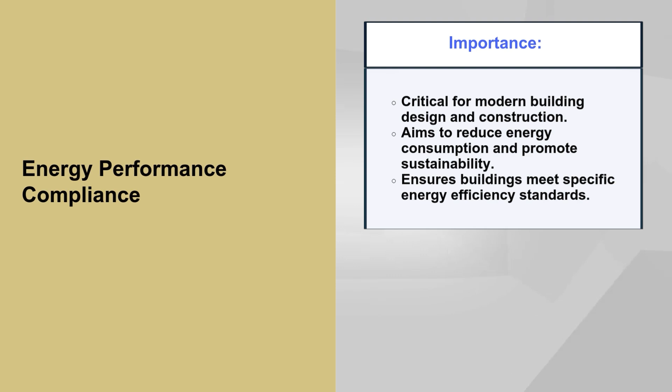Energy performance compliance is a critical aspect of modern building design and construction aimed at reducing energy consumption and promoting sustainability. It ensures that buildings are designed and constructed to meet specific energy efficiency standards, minimizing their environmental impact and reducing operational cost. This presentation delves into the intricacies of the ECBC code compliance framework, focusing on key concepts such as the Energy Performance Index or EPI and EPI ratio.

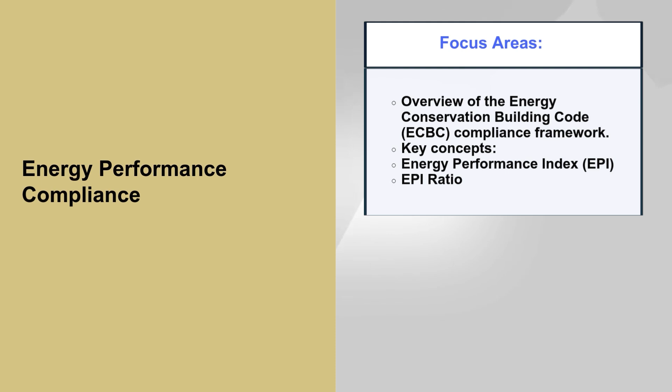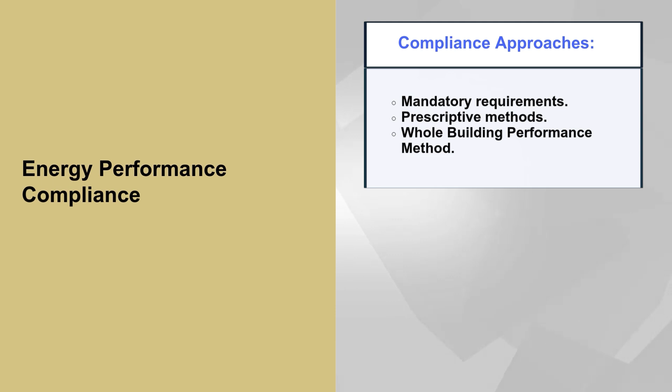We will explore various compliance approaches including mandatory requirements, prescriptive methods and the whole building performance method. Additionally, we'll discuss essential documentation and tools used to demonstrate compliance, providing a comprehensive understanding of energy performance standards in building design. Energy performance compliance is a multifaceted process that involves a collaborative effort between architects, engineers, contractors and building owners. It requires careful planning, design consideration and implementation of sustainable strategies to achieve optimal energy efficiency.

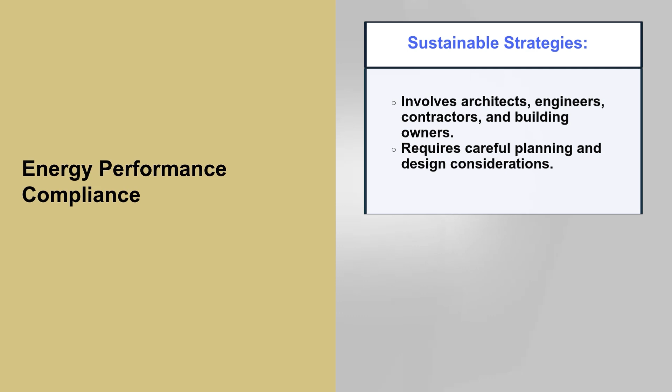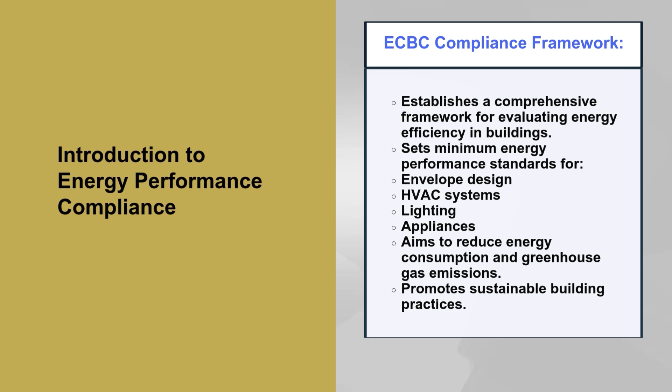This presentation will provide a comprehensive overview of the ECBC compliance framework, guiding you through the key aspects of ensuring energy efficient and sustainable building. Energy performance compliance, ECBC compliance framework. The ECBC code establishes a comprehensive framework for evaluating and ensuring energy efficiency in buildings. It sets minimum energy performance standards for various building components and systems, including envelope design, HVAC systems, lighting and appliances. The ECBC aims to reduce energy consumption, minimize greenhouse gas emissions and promote sustainable building practices.

Energy Performance Index or EPI. The EPI is a crucial metric that quantifies a building's energy efficiency. It is calculated as the annual energy consumption per square meter of the building's total built-up area, excluding unconditioned basements. This metric helps assess a building's energy performance relative to a standard baseline and provides a valuable tool for comparing different designs and technologies. EPI ratio. The EPI ratio compares the proposed building's EPI to that of a standard building. A ratio of less than or equal to 1 indicates compliance with energy performance standards, demonstrating that the proposed building is at least as efficient as the standard. This ratio is essential for demonstrating compliance with the ECBC and ensuring that buildings meet the specified energy efficiency goal.

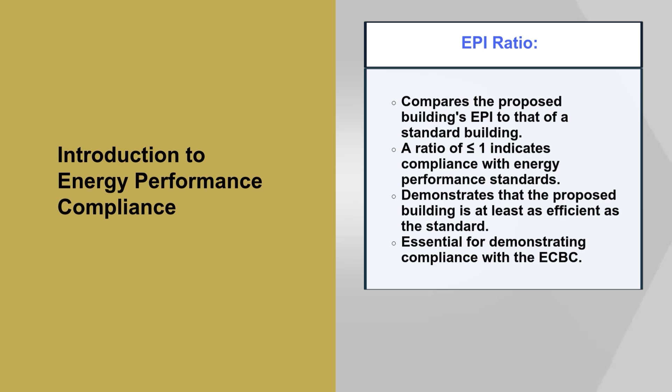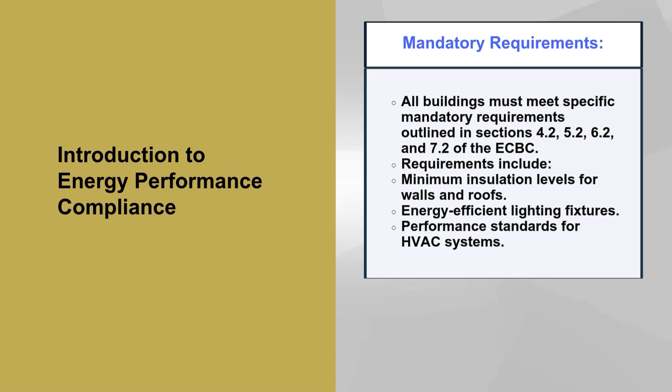Mandatory requirements. All buildings must meet specific mandatory requirements outlined in sections 4.2, 5.2, 6.2 and 7.2 of the ECBC code. These encompass various aspects of building systems and building design, including minimum insulation levels for walls and roofs, energy efficient lighting fixtures, and performance standards for the HVAC systems. These requirements establish a baseline level of energy efficiency that must be achieved by all the buildings to comply with the code.

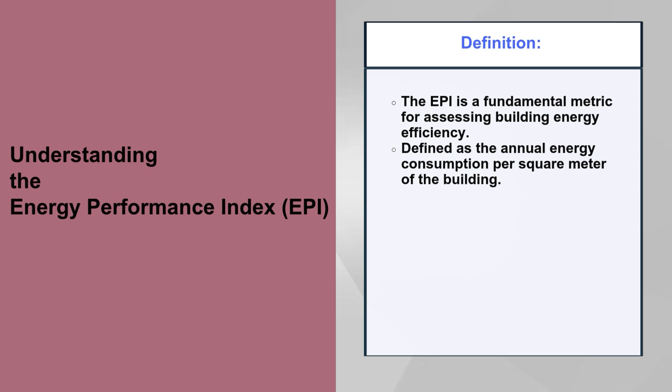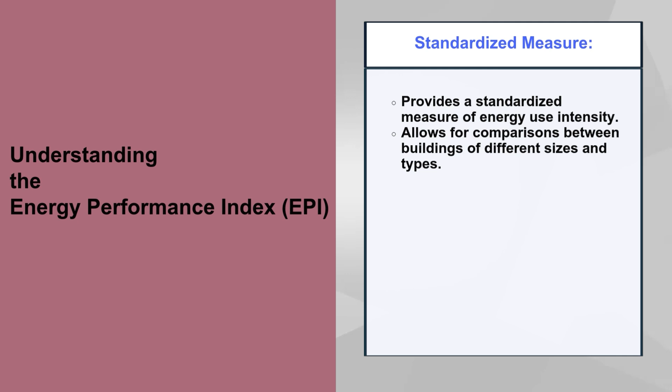Understanding the Energy Performance Index or EPI. The Energy Performance Index EPI is the fundamental metric in assessing building energy efficiency. It is defined as the annual energy consumption per square meter of the building. The EPI provides a standardized measure of energy use intensity, allowing for comparisons between buildings of different sizes and types. The EPI helps assess a building's energy performance relative to a standard baseline and provides a valuable tool for comparing different designs and technologies. The EPI ratio is a critical component in determining compliance with the energy performance standard.

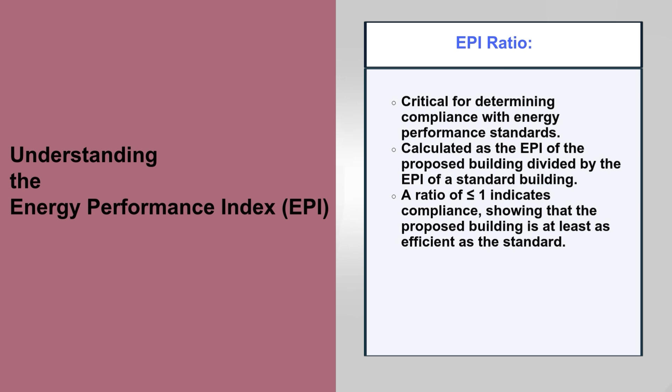It is calculated as the EPI of the proposed building divided by the EPI of a standard building. A ratio of less than or equal to 1 indicates compliance with energy performance standards, demonstrating that the proposed building is at least as efficient as the standard. This ratio is essential for demonstrating compliance with the ECBC and ensuring that buildings meet the specified energy efficiency goal. To achieve compliance, the EPI ratio must be less than or equal to 1, indicating the proposed building is at least as energy efficient as the standard building.

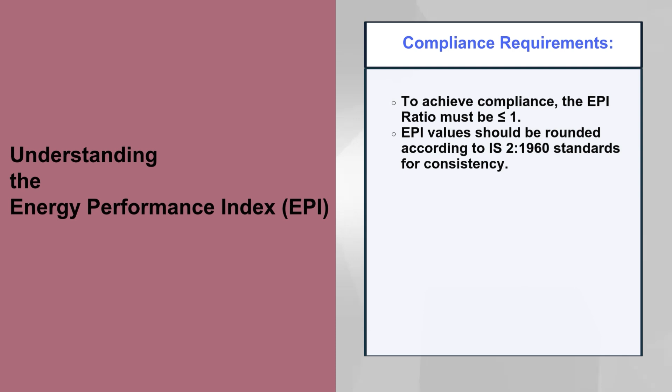It's important to note that EPI values should be rounded off according to IS 2:1960 standards to ensure consistency in calculations and comparison. The EPI and EPI ratio serve as key indicators for a building's energy performance. They provide a quantitative basis for evaluating compliance with energy codes and standards. By comparing the proposed building's energy consumption to that of a standard reference building, these metrics offer a clear and objective measure of energy efficiency, guiding designers and engineers in creating more sustainable structures.

The EPI is a crucial tool for measuring and tracking the energy performance of buildings over time. By monitoring EPI values, building owners and operators can identify areas for improvement and implement strategies to enhance energy efficiency. This data can also be used to benchmark performance against industry standards and demonstrate commitment to sustainability goals.

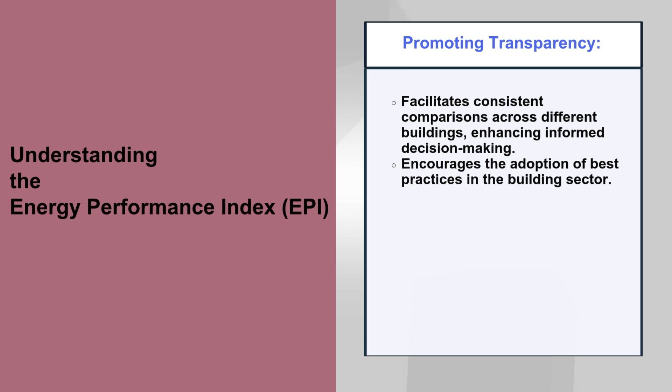Furthermore, the EPI plays a crucial role in promoting transparency and accountability in the building sector. It allows for consistent comparison across different buildings, facilitating informed decision making and encouraging the adoption of best practices. By fostering a culture of transparency, the EPI helps drive innovation and advancement in building energy efficiency.

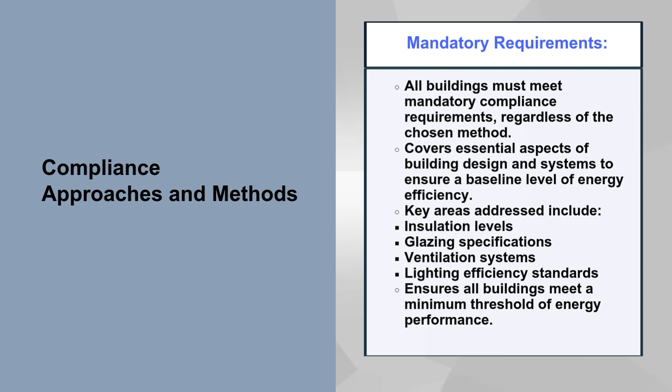Compliance approaches and methods. Mandatory requirements. All buildings must meet mandatory compliance requirements regardless of the chosen compliance method. This requirement covers essential aspects of building design and systems to ensure a baseline level of energy efficiency. These mandatory requirements typically address key areas like insulation levels, glazing specification, ventilation systems, and lighting efficiency standards. This ensures that all buildings, regardless of their specific design approach, meet a minimum threshold of energy performance.

Prescriptive method. The prescriptive method involves meeting prescribed values for envelope components, comfort systems, and lighting. It includes sub-methods like the building envelope trade-off method and total system efficiency method, offering flexibility in achieving compliance while adhering to specific prescriptive requirements. The prescriptive method provides clear guidelines and specific requirements for each building element, making it relatively straightforward to understand and implement. It's particularly beneficial for simpler projects where the design and construction process can be readily adapted to meet the predefined standards. Next is whole building performance method.

The whole building performance method or WBP method allows for a more holistic approach to compliance. Under this method, a building can achieve compliance if its proposed design energy use is less than that of the standard design, even without meeting specific prescriptive requirements. This approach offers greater design flexibility while still ensuring overall energy efficiency. The WBP method provides a more dynamic and adaptable approach to energy performance compliance. It encourages innovative design solutions that may not adhere to traditional prescriptive standards but still demonstrate effective energy performance.

The EPI ratio and WBP method. When using the WBP method, the EPI ratio is calculated by comparing the proposed building energy performance to that of a standard building. Compliance is achieved if the resulting EPI ratio is less than or equal to 1, demonstrating that the proposed design is at least as energy efficient as the standard. This approach allows for a more comprehensive evaluation of the building energy performance, considering its overall energy use and efficiency, rather than relying solely on individual component specification.

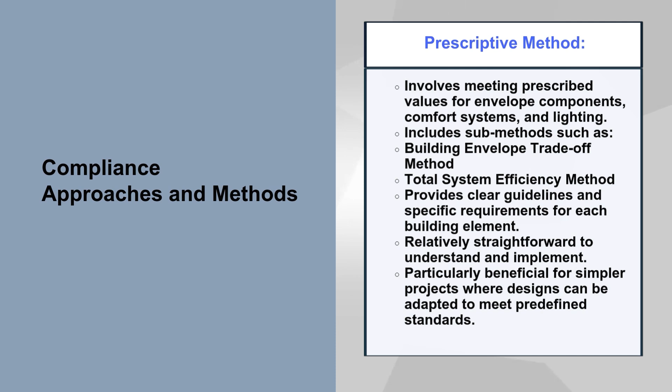Introduction to the whole building performance method. The whole building performance method or WBP method offers an alternative approach to energy conservation in building design as outlined in the Energy Conservation Building Code. This method provides flexibility for architects and engineers to optimize energy efficiency across various building systems while meeting the mandatory requirements. Unlike the prescriptive method, the WBP method allows for innovative solutions and trade-offs between different building components, making it applicable to all building types covered by the ECBC.

The WBP method encourages a holistic approach to building design, considering the interaction of various building systems and their impact on energy performance. This method allows for a more customized approach, tailoring solutions to specific building needs and local climatic conditions. By evaluating the energy performance of the entire building, the WBP method promotes a comprehensive understanding of energy consumption patterns and potential areas for optimization.

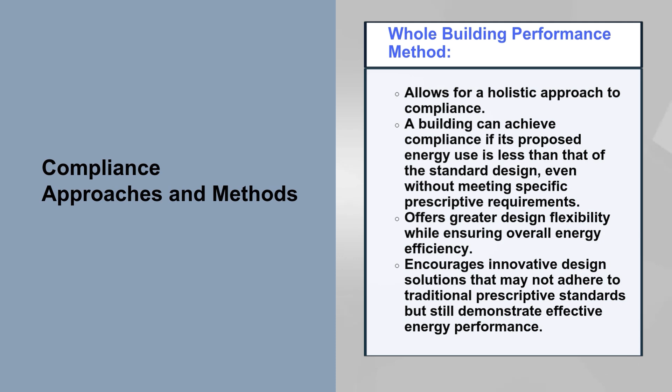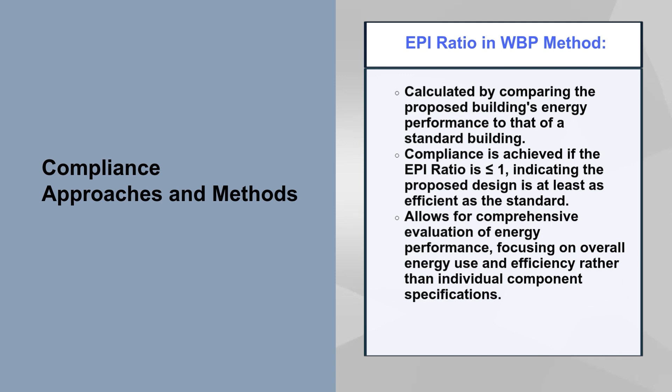To achieve compliance using the WBP method, a building must demonstrate an energy performance index (EPI) ratio of 1 or less, indicating that the proposed building design performs at least as well as a standard reference building. The EPI ratio is calculated by comparing the building's estimated energy use to that of the reference building, considering factors such as building size, climatic conditions, and occupancy. A lower EPI ratio indicates better energy efficiency.

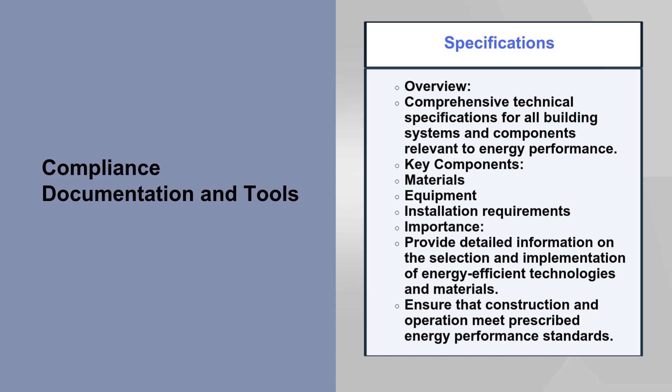This approach encourages holistic thinking in building design and promotes the integration of energy efficient technologies and strategies. By focusing on overall energy performance rather than prescriptive requirements, the WBP method facilitates the implementation of innovative solutions such as renewable energy systems, advanced building materials, and smart building technologies.

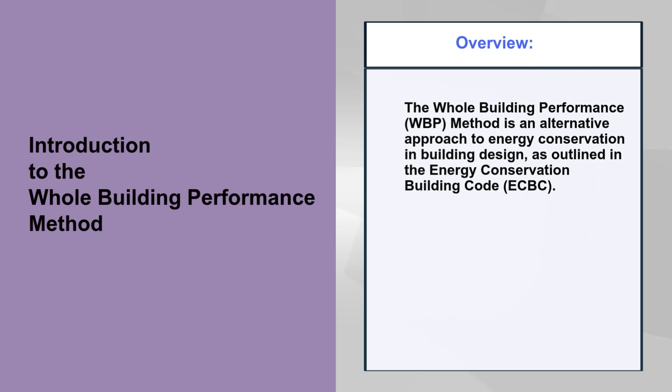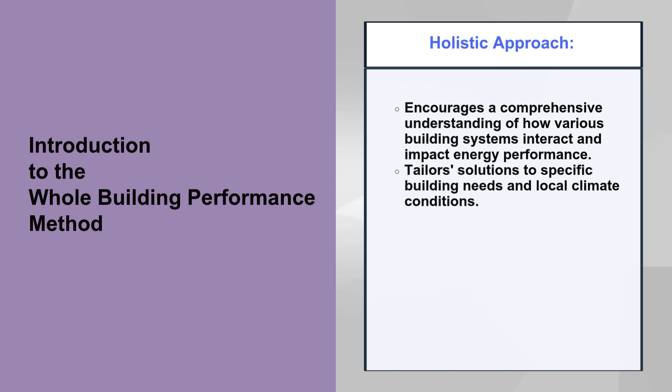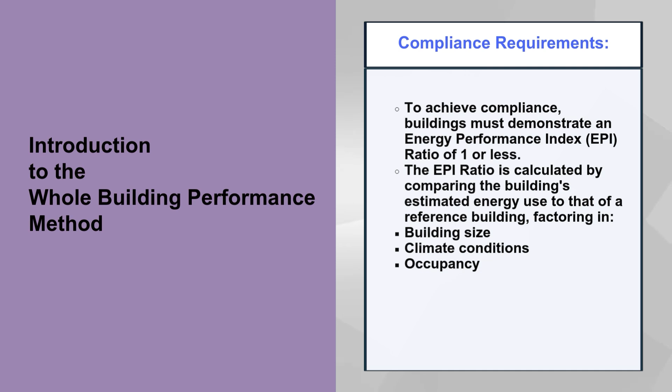Calculating annual energy use and trade-off. The whole building performance method offers flexibility in building design by allowing some trade-off between different building systems, while still ensuring the overall energy performance of the building meets or exceeds the standard. To use the WBP method, you need to calculate the building's annual energy use and compare it to the standard reference building. The following steps outline the process for calculating the building energy use and conducting a trade-off analysis.

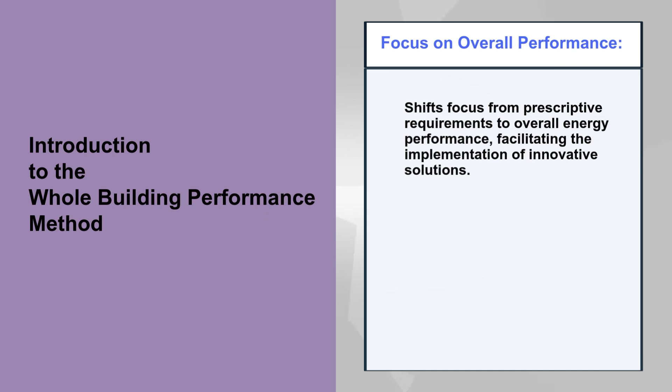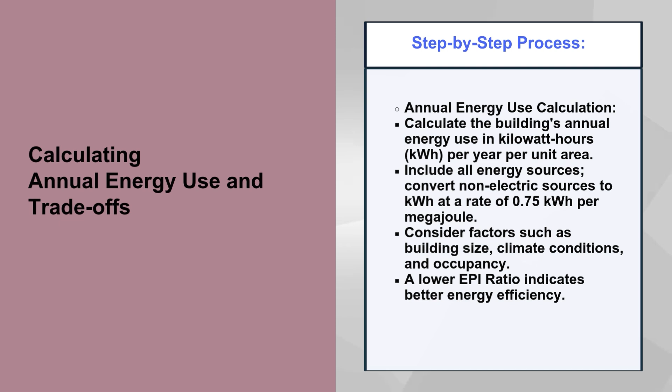Step number 1: annual energy use calculation. Calculate the building's annual energy use in kilowatt hours per year per unit area. This includes all energy sources, with non-electric sources converted to kWh at a rate of 0.75 kWh per megajoule. This calculation considers factors such as building size, climatic condition, and occupancy. A lower EPI ratio indicates better energy efficiency.

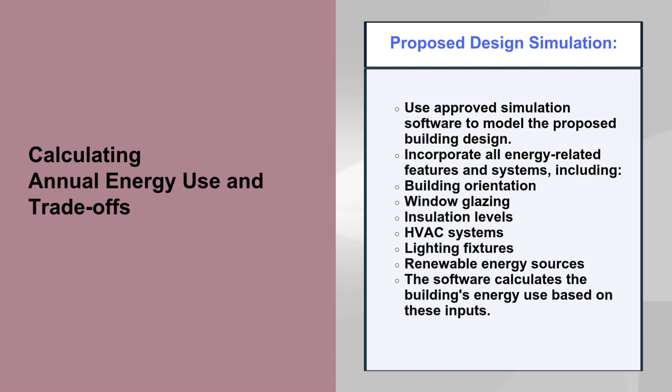Step 2: proposed design simulation. Use approved simulation software to model the proposed building design incorporating all the energy related features and systems. This includes factors such as building orientation, window glazing, insulation levels, HVAC systems, lighting fixtures and renewable energy sources. The simulation software will then calculate the building energy use based on these inputs.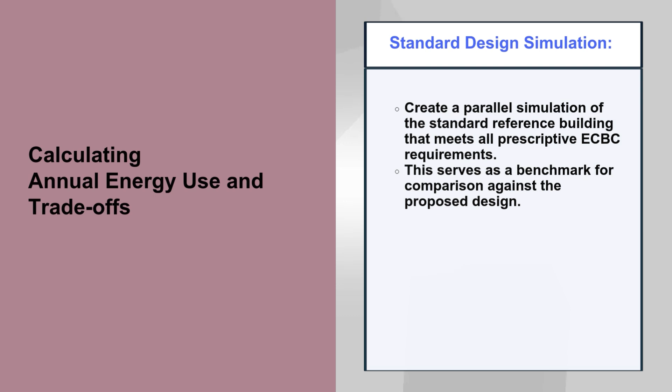Step number 3, standard design simulation. Create a parallel simulation of the standard reference building which meets all the prescriptive ECBC requirements. This simulation will serve as a benchmark for comparison against the proposed design.

Step number 4, trade-off analysis. Compare the annual energy use of the proposed and the standard design. This analysis allows for trade-off between different building systems while ensuring that the overall energy performance of the building meets or exceeds the standards. This means that you can make changes to the building design, such as adding more insulation or using a more effective HVAC system, and then compare the energy use of the revised design to the standard design. This allows you to optimize the building energy performance while still meeting the requirements of the ECBC.

The WBP method allows for significant flexibility in design, permitting trade-off between different building systems. However, it's important to note that this method can be applied to building permits covering less than the whole building, provided that the design parameters not covered by the permit remain identical for both the proposed and standard design. This approach ensures a fair comparison while allowing for partial renovation or additions to existing structures.

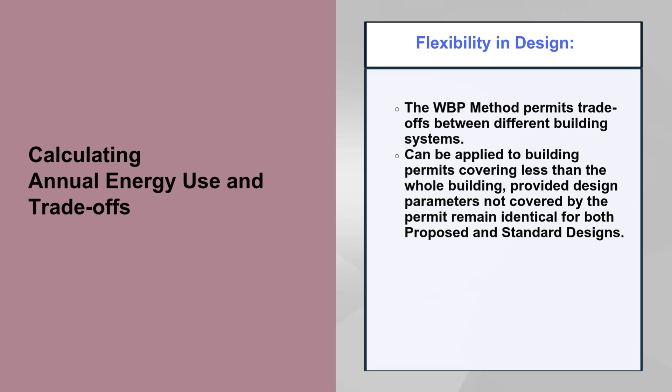Documentation and compliance tool. Documentation requirements. To demonstrate compliance with the WBP method, project teams must provide comprehensive documentation. This includes a detailed summary of analysis results showcasing the energy used for both the proposed and standard design. The documentation should also contain a thorough description of the project details, energy related features and how the design meets all the mandatory requirements outlined in sections 4 through 7 of the ECBC code. The documentation should be clear, concise and easily understood by reviewers, providing a comprehensive overview of the project's energy performance and compliance with the WBP method.

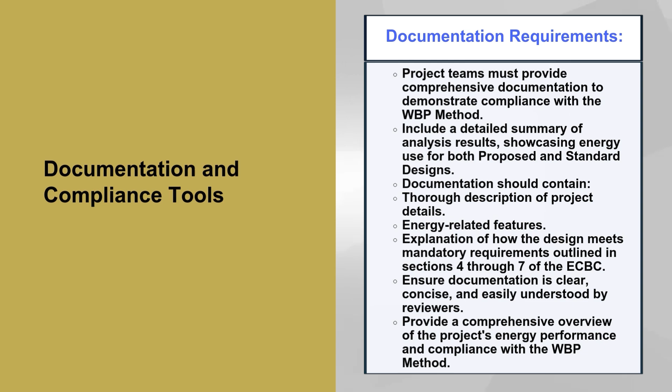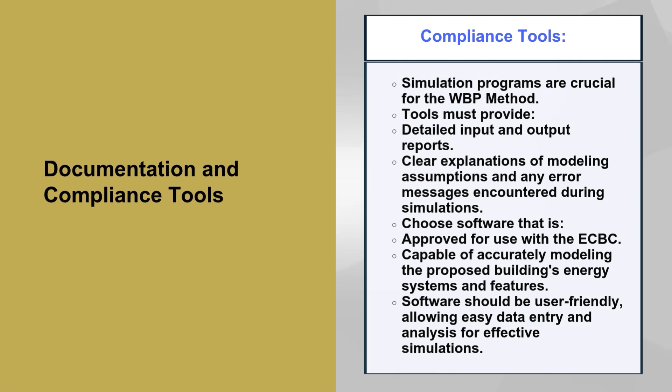Compliance tool. Simulation programs play a crucial role in the WBP method. These tools must provide detailed input and output reports, clearly explaining modeling assumptions and any error messages encountered during the simulation process. It's essential to choose software that is approved for use with the ECBC and capable of accurately modeling the proposed building energy systems and features. Additionally, the software should be user-friendly and allow for easy data entry and analysis, enabling project teams to effectively conduct simulations and generate accurate results.

To verify compliance, project teams must submit building plans and site plans alongside the energy simulation results. These documents allow reviewers to cross-reference the model design with the actual building specification, ensuring that all energy-related features are accurately represented in the simulation and that the building as designed will meet the required energy performance standards. The verification process aims to ensure a robust and thorough assessment of the project's energy performance, confirming that the proposed design meets or exceeds the established energy efficiency standards.

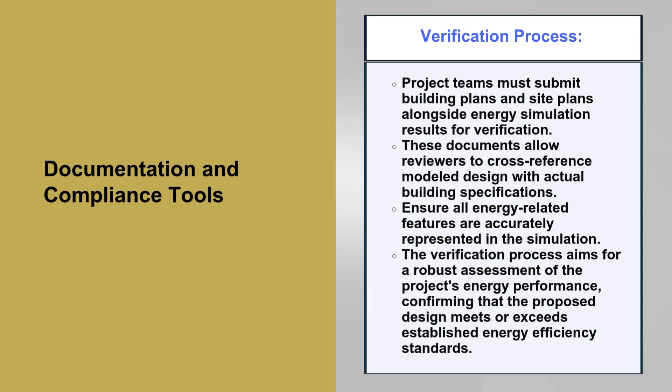Ensuring compliance in building design simulation. Simulation consistency: utilizing the same simulation program for both the proposed and standard designs to ensure comparable results. This consistency is crucial for accurate energy performance assessment and compliance calculation.

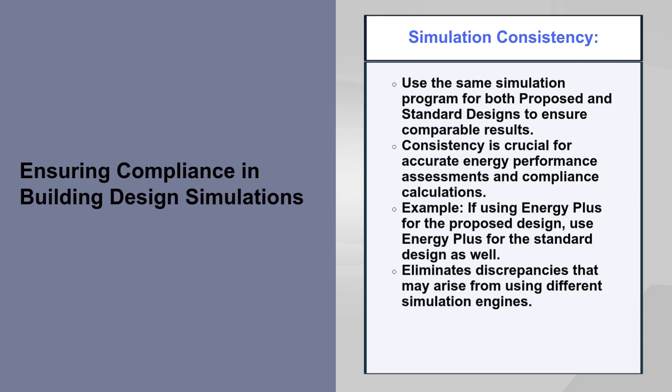For example, if you are using EnergyPlus for the proposed design, make sure to use EnergyPlus for the standard design as well. This consistency is necessary to eliminate any discrepancies that may arise from using different simulation engines.

Weather data uniformity. Apply identical weather data sets to both design models. This approach eliminates variables that could skew the comparison between the proposed and standard design, providing a level playing field for evaluation. Make sure to use the same weather data files, thereby eliminating any potential bias introduced by different weather data sets.

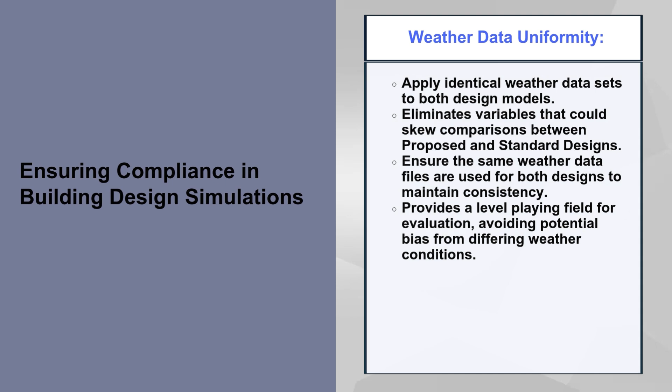Operational assumptions. Maintain consistent building operation assumptions across both models. This ensures consistent occupancy patterns, equipment usage, and other operational parameters that significantly impact energy consumption. Use the same schedules, equipment operating hours, and other relevant operational data for both the proposed and standard design. This consistency is crucial for accurately assessing the energy performance differences between the two designs.

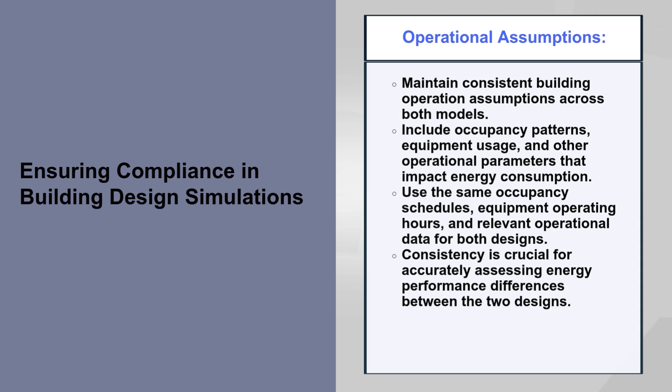Energy simulation model requirements. Developing an accurate and compliant energy simulation model is crucial for evaluating the energy performance of building design. We'll discuss the essential requirements for creating models that meet code standards and provide reliable data for informed decision making.

Table 9.1 of the ECBC code serves as a critical framework for developing energy simulation models for both the standard and proposed designs of buildings. It outlines specific requirements for various components, ensuring that energy efficiency measures are accurately represented and compliance with energy codes is achieved. The table is essential for maintaining consistency and accuracy in energy modeling.

First parameter, design model. The design model for the proposed design must align with the design documents, accurately representing fenestration, opaque envelope types and areas, as well as interior lighting power, HVAC system types, controls and sizes. This ensures that the energy model reflects the actual design intentions and specifications.

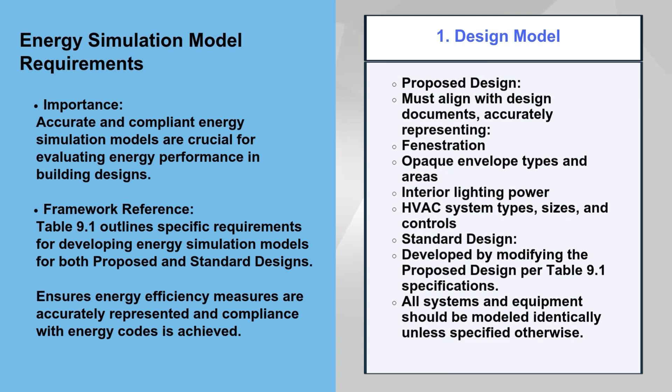For the standard design, the model is developed by modifying the proposed design according to the specifications mentioned in the table. Unless specified otherwise, all building systems and equipment should be modeled identically in both the standard and proposed design. This approach ensures that any energy efficiency measures can be directly compared against a baseline model that adheres to mandatory and prescriptive requirements.

Second one, space use classification. Space use classification is crucial for determining the operational characteristics and energy requirements of different building zones. The proposed design must classify building types or space types in accordance with section 2.5 of the ECBC code, allowing for more accurate modeling of mixed use facilities. The standard design follows the same space use classification as the proposed design, ensuring consistency in how different spaces are treated in the energy model.

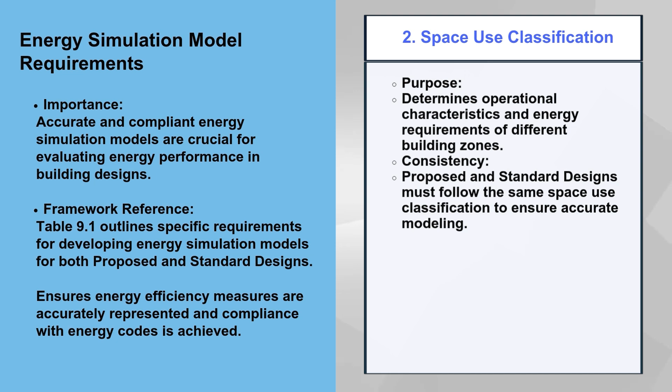Third one is schedule. Operational schedules, including hourly variation in occupancy, lighting power, equipment power and HVAC operation, are essential for demonstrating compliance with energy codes. These schedules must be suitable for the building or space type and modeled as per section 9.6 of the code. Both the standard and proposed design must have identical temperature and humidity schedules and set points, with exceptions allowed for non-standard efficiency measures subject to approval.

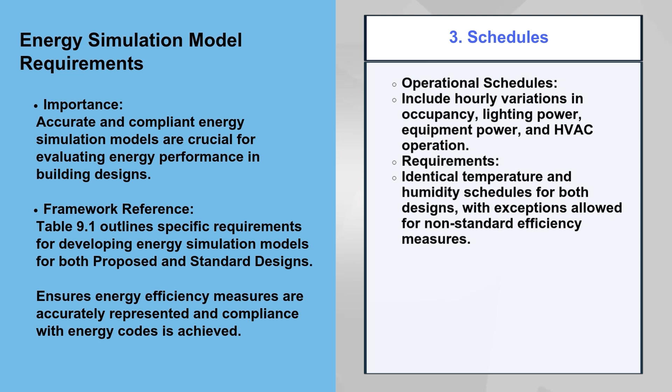Fourth one is building envelope. The building envelope in the proposed design must be modeled according to the architectural drawings, or as installed for existing buildings. Exceptions are permitted for elements covering less than 5% of the total area of that assembly type. The standard design must have identical conditioned floor area, exterior dimensions and orientation as the proposed design, with specific exceptions noted in the table. This includes orientation consideration where performance is averaged across multiple simulations with different building orientations.

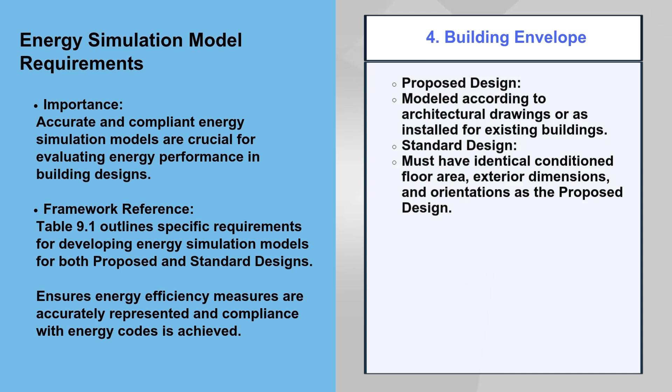Fifth one is lighting. Lighting power in the proposed design is determined based on the existing systems or design specification. It includes all lighting system components such as lamp or ballast. Minimum lighting control as per the ECBC requirement must be modeled in the proposed case. In the standard design, interior lighting power is determined using the same categorization procedure as the proposed design, with power set to the maximum allowed by the ECBC. Lighting control must comply with ECBC standards.

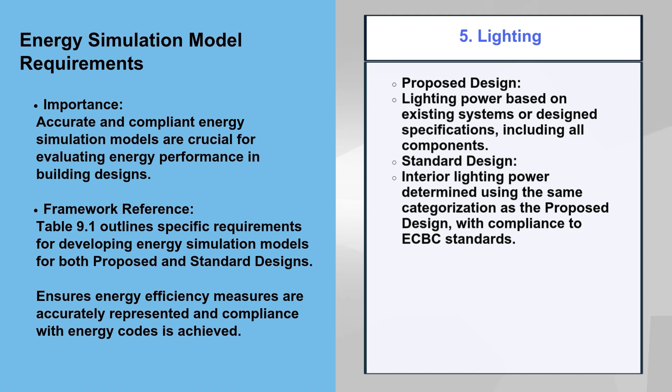Sixth one is HVAC thermal zones. HVAC zones in the proposed design must be modeled based on design drawings, with each zone treated as a separate thermal block. Identical zones may be combined for simplicity. If HVAC zones are not defined, they should be based on similar occupancy, internal loads and set points. The standard design follows the same zoning approach as the proposed design, ensuring consistency in thermal modeling.

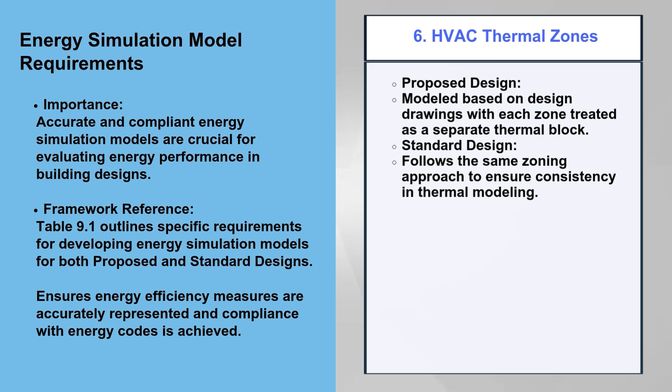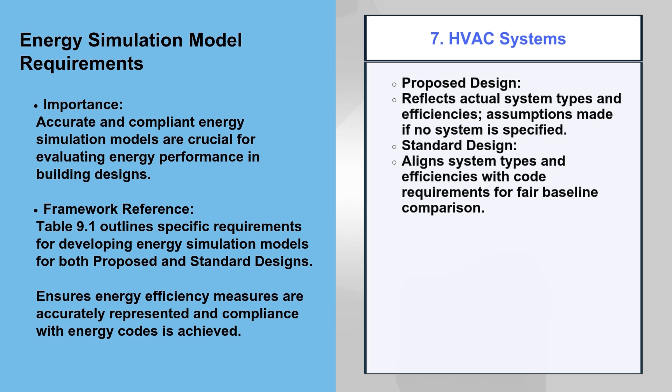The HVAC system type and related performance parameters in the proposed design should reflect actual system types and efficiencies. If no system is specified, assumptions are made to ensure consistency with the standard design. The standard design uses a similar approach but with system types and efficiency aligned with code requirements, ensuring a fair baseline for energy performance comparison.

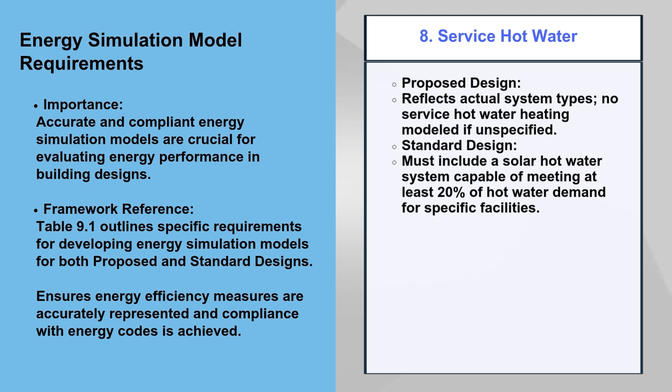Number 8 is service hot water. The service hot water system type and related performance parameters in the proposed design should reflect actual system types and efficiency. If no system is specified, no service hot water heating is modeled. The standard design should include a solar water system capable of meeting 20% of the hot water demand for residential facilities, hotels and hospitals.

Ninth one, miscellaneous load. Receptacle, motor and process load should be modeled and estimated based on the building type and space type category. These loads must be included in simulation for both the standard and proposed design.

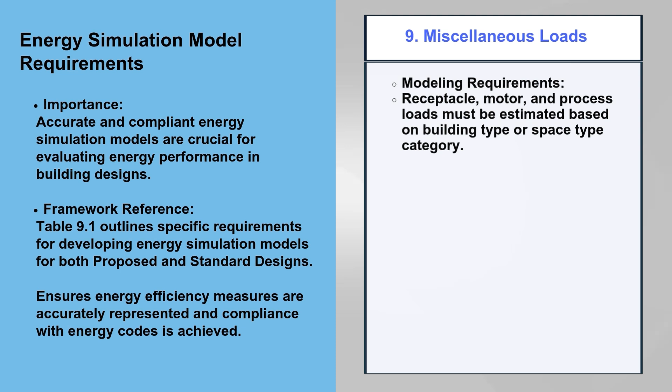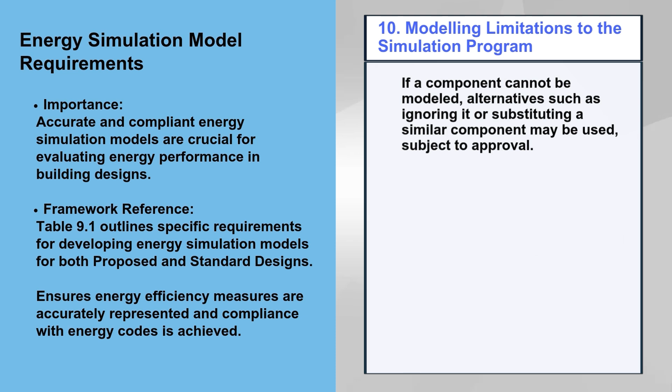10th one, modeling limitations of the simulation program. If the simulation program cannot model a component or system in a proposed design, methods such as ignoring the component, substituting a thermodynamically similar component, or using the HVAC system of the standard design may be used, subject to approval. The component must be modeled identically for both designs.

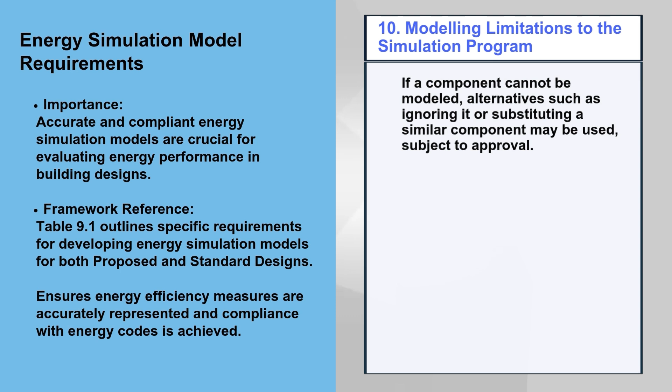To summarize, Table 9.1 provides a structured approach to developing energy simulation models for building design. By ensuring consistency and adherence to energy code, it facilitates accurate comparison between proposed and standard design. This is essential for achieving energy efficiency and compliance with building regulations, ultimately contributing to sustainable building practices.

Standard design adherence. Ensure the standard design model incorporates all mandatory and prescriptive requirements for ECBC compliance. This serves as a baseline for comparing the energy performance of the proposed design. This means that the standard design model should represent the building as it would be built if it were to meet the minimum code requirements without any additional energy saving features. This provides a benchmark for evaluating the energy performance improvements achieved by the proposed design.

Proposed design accuracy. Model the proposed building design to accurately reflect the actual building specification, including any innovative or energy efficient features that deviate from standard practices. This includes modeling all building components, materials and systems such as HVAC systems, lighting system and envelope insulation with high fidelity. The model should accurately represent the performance of any proposed energy saving technologies such as solar panels, geothermal heat pumps or high efficiency lighting fixtures.

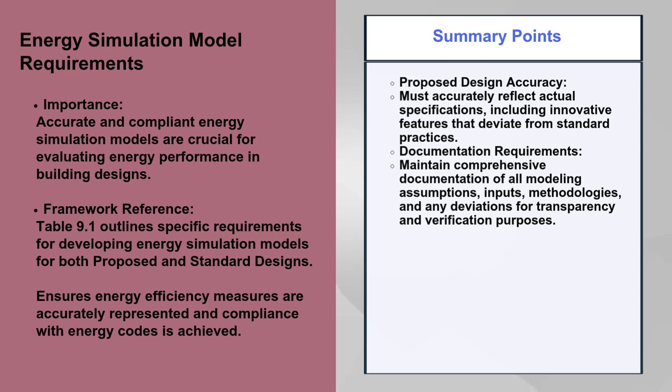Followed by documentation. Maintain comprehensive documentation of all modeling assumptions, inputs and methodologies used in both the proposed and standard design simulation for transparency and verification purposes. This documentation should include detailed description of all modeling parameters, data sources and assumptions made during model development. It should also include a clear explanation of any deviations from the standard modeling procedures and any limitations or uncertainties associated with the model. This comprehensive documentation facilitates review and verification by stakeholders, ensuring the accuracy and reliability of the simulation results.

HVAC system and energy compliance. Ensuring compliance with ECBC code is paramount for sustainable building design. They detail the specific compliance level of HVAC system in relation to the ECBC. The ECBC outlines specific criteria for HVAC system, which are critical components in achieving energy efficiency in buildings. The requirements are categorized into 3 compliance levels: ECBC, ECBC Plus and Super ECBC.

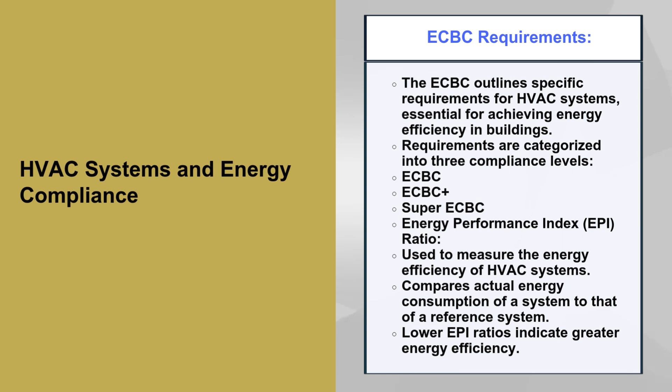The Energy Performance Index or EPI ratio is used to measure the energy efficiency of HVAC system. This ratio compares the actual energy consumption of a system to the energy consumption of a reference system. Lower EPI ratio indicates greater energy efficiency. The table also presents the EPI ratio requirements for various climatic zones and compliance levels. For instance, in a hot dry climate, an HVAC system achieving ECBC compliance must have an EPI ratio of 1 or less, while the ECBC Plus system requires an EPI ratio of 0.91 or less.

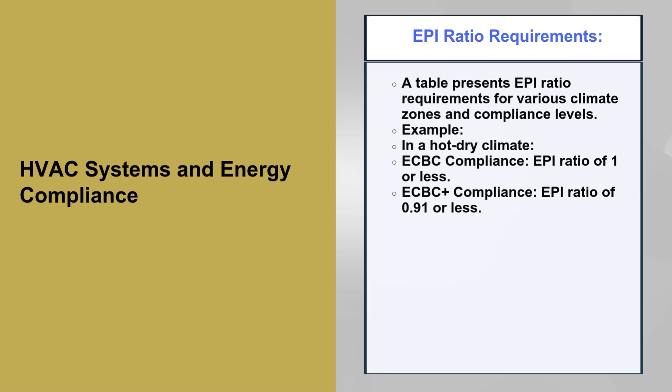By adhering to these compliance levels, building designers can ensure that HVAC systems contribute to overall system efficiency and meet the requirements for sustainable construction. These regulations encourage the use of energy efficient technologies and design strategies, leading to a reduction in building energy consumption and a positive impact on the environment.

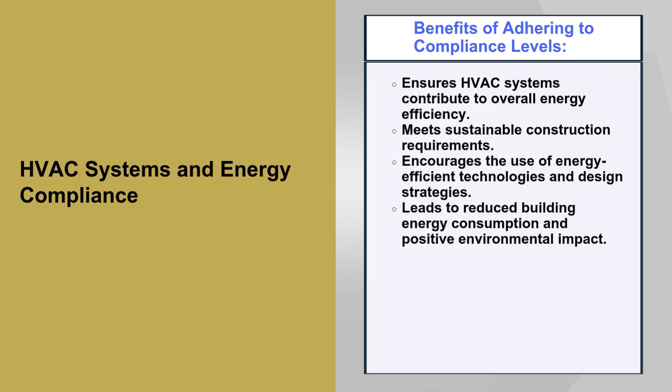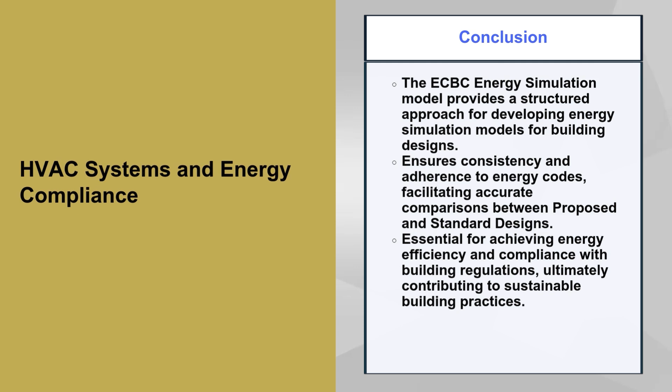In conclusion, ECBC Energy Simulation Model provides a structured approach to designing energy simulation models for building design. By ensuring consistency and adherence to energy code, it facilitates accurate comparison between proposed and standard design. This is essential for achieving energy efficiency and compliance with building regulations, ultimately contributing to sustainable building practices.

In the upcoming lecture, we will explore the case studies in code compliance with emphasis on examples of energy efficient building projects, deployed compliance strategies and challenges faced, and key lessons learned from the successful code compliance projects.